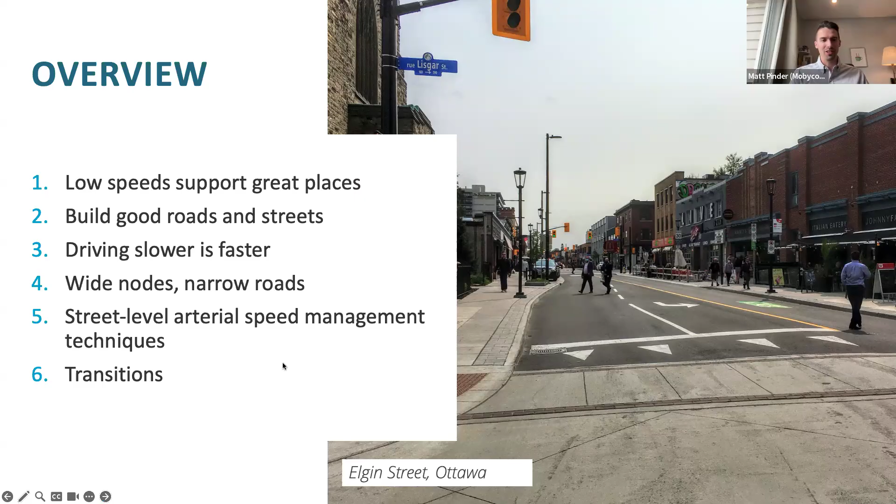And then a last discussion on transitions, urban to rural, and other types of context changes along streets.

So the first thing that I want you to take away from this presentation is the link between speed and place. There are two things that our streets and our public realms need to do in our cities.

One is move people. That's pretty clear. As a transportation practitioner, I'm pretty familiar with this one. It's essential for our activities, our economy, our services, our goods, and for us to get to work and everywhere else we need to go.

The important thing is, though, when there's a lot of movement happening in a place, it can diminish the quality of that place, and we're going to dig into that in a little bit.

But here's an example of a really well-designed movement corridor. You can see it's wide, it's open, it's pretty easy to drive along, and you can imagine someone driving at a reasonably fast speed there.

Place, on the other hand, these are the really vibrant places where you want people to be out in the street, talking to each other, socializing. This is a pedestrian street in Ottawa, but on streets with cars, of course, these activities happen as well.

Movement and place is a framework developed in Australia that has really helped guide their safety programs and a lot of how they build their community design. They basically assert that there are four types of streets or street environments.

The local streets, we're all pretty familiar with those. Civic spaces are pretty unique streets that, similar to that Sparks Street example before, have a really high focus on placemaking. But then when we talk about arterials, there are two types.

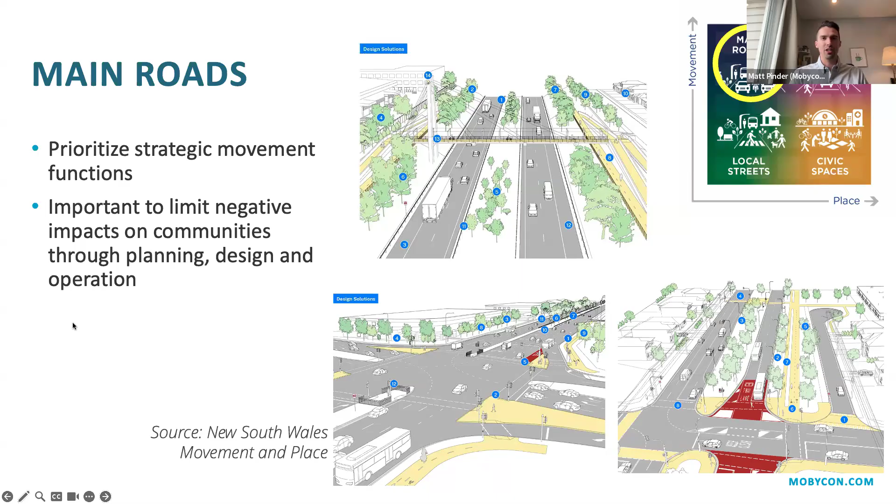These are essential for our communities, but they need to be carefully managed because they can sever communities, and there's been a lot of historical challenges created by highways in Canadian communities.

Main streets, you can see, look very different. They are trying to balance moving people in and around the area, but also creating wide, generous public realms with boulevards and patios and streetscaping and trees. Really important places for people to be able to walk and cycle easily.

A safe, low-speed environment is essential here, and there's different ways to design them depending on the suburban or urban context that need to prioritize different modes of travel.

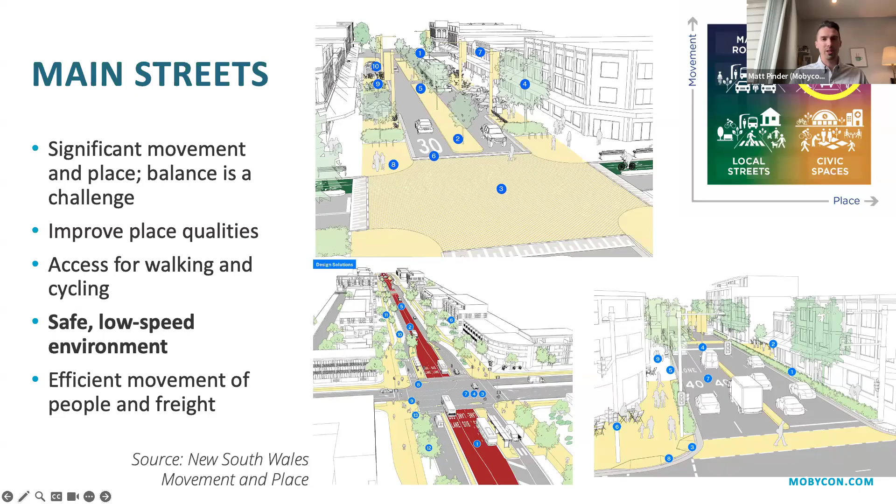And this is where speed really comes into play. In Australia, they've just published some research, an economic study looking at how speed relates to the economy of an area. They've found that reducing the speed limit from 50 to 30 kilometers an hour on any street that's important for pedestrians, so think of your town's main street or any commercial corridor, the benefits significantly outweigh the costs.

So, benefits in terms of easier to cross the street so people can shop more.

So first and foremost, when we're thinking about speed, we want to manage it in the right places, and there are some absolutely essential places to manage speed. This is how the Dutch divide up their urban roads. They have a pretty principled approach to it, and it works quite well for them. They have the lowest speed category of streets called access streets.

Because speeds are very low, these are usually the best places. There's often main streets in old towns that are wider than this, but they're still following that 30 kilometer an hour paradigm, and car traffic noise is very minimal. It's very easy to cross the street. These are wonderful places. The Dutch still have distributor roads, which we might call arterials. These are okay places, but you can start to see how traffic dominates the environment. And then the Dutch build a lot of roads through traffic corridors where there's really no desire to make any kind of place quality there.

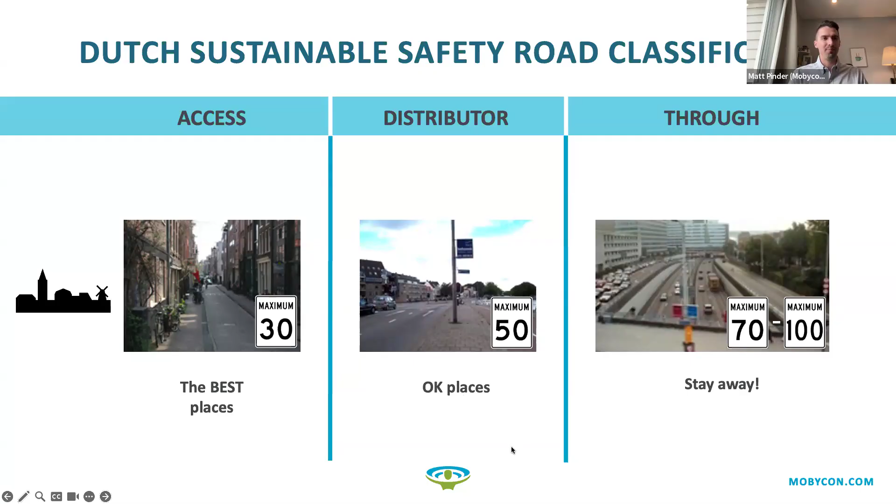So the next logical step, now that we've talked about the influence of speed on quality places, is where do we want speed to be? Where do we want to encourage speed, and where do we want to carefully manage it?

Imagine you're starting a trip from your house and you're just driving on the streets in your community. The Dutch principle is that people are willing to tolerate about 6 minutes at 30 kilometers an hour before they start to get impatient and want to be on a higher order road. After those 6 minutes, someone's willing to tolerate a faster road, like an arterial or a Dutch distributor, for about 9 minutes. And within 15 minutes, you want to have your drivers on a high-speed corridor, generally a freeway, but it could also be a well-designed road.

And you can try to relate this into your own driving experience. Many Canadians live within probably a 15-minute drive of a freeway, and those are the corridors that we're using to travel longer distances.

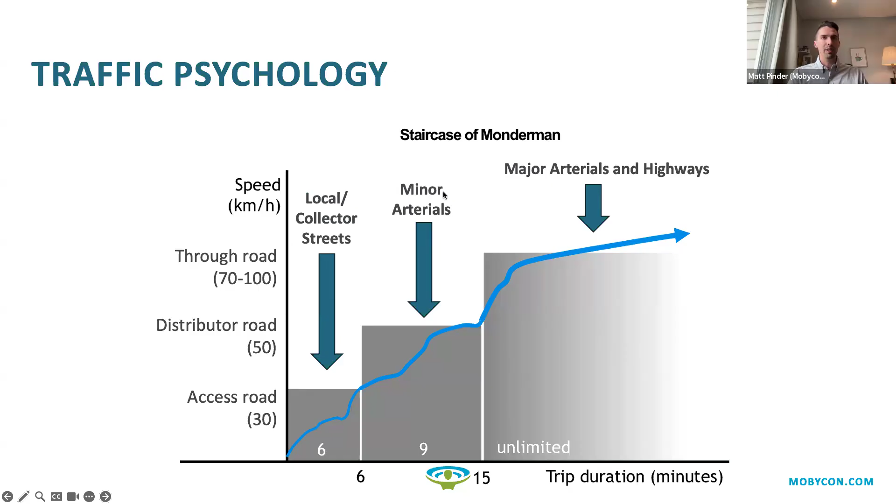And when we relate this to our street designs, that first 6 minutes is usually on local and collector streets. The next 9 minutes is on minor arterials, and then the longer trips are what we would call major arterials and highways.

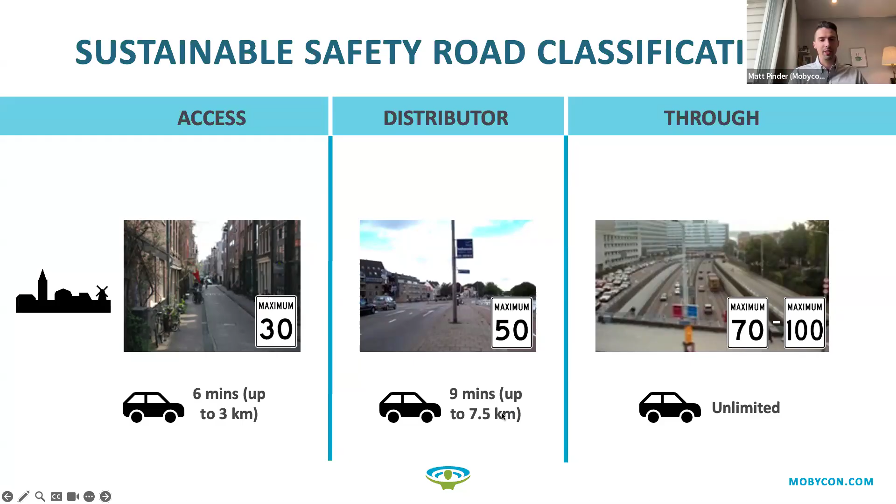And just to put some time perspective to that on the Dutch framework, that's about 3 kilometers that someone would be willing to travel in that 30-kilometer zone. So actually quite a significant distance if you put that into the scale of your neighborhood. Another 7.5 kilometers on a distributor road. And so basically everybody should be within 10 kilometers of a well-designed road that can connect to the broader mobility driving network.

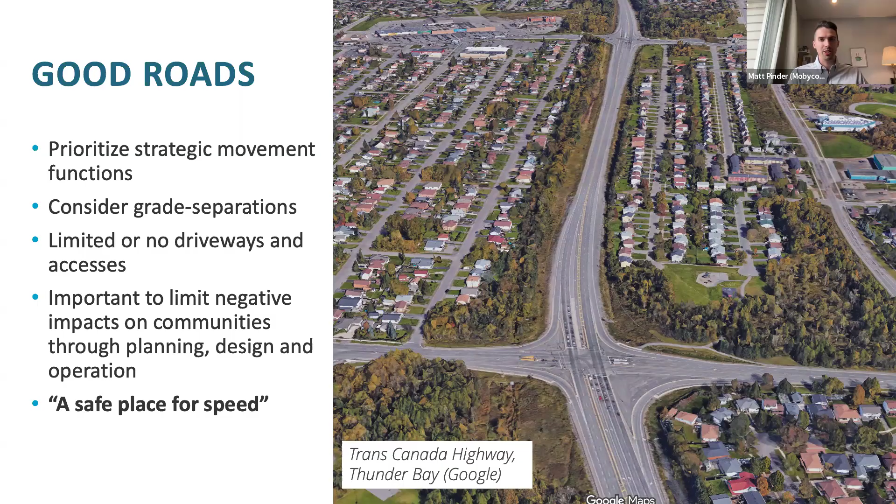So a good road, we need to build lots of these, or we need to build them right. A good, well-designed road prioritizes movement functions. It's great for goods movement. These are locations where we might build grade-separated crossings for pedestrians and cyclists, or grade-separated interchanges, like on our freeway highways. And it's really important that there's no land use along these corridors, there's no driveways, they're a very simple, well-designed environment. And what I would call this in the speed management framework is these are safe places to speed.

We have created well-designed highways where people can travel at speed without a lot of negative consequence. And our geometric design guidance for engineering has been focused on how to build great roads for many, many years. We know that we want straight roads, good alignments with super elevation, and that the lack of any of these can cause challenges. But importantly, this is the design language for how we design roads.

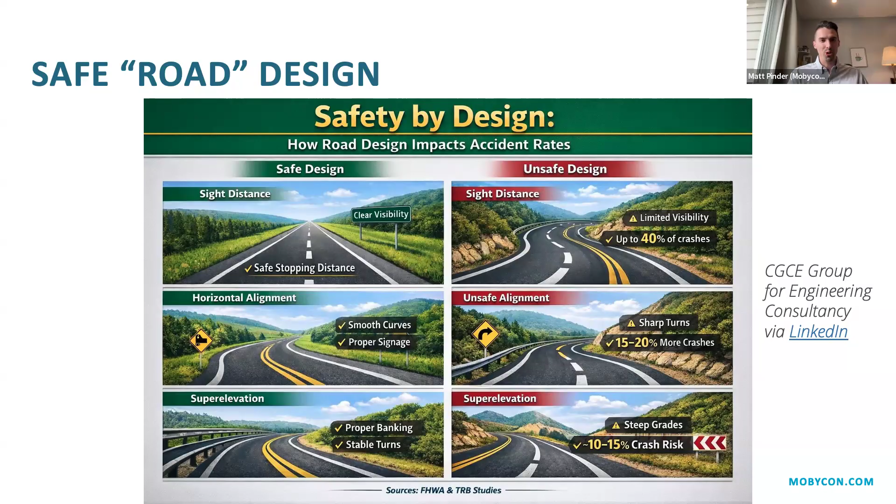I really like this framework from the Global Designing Cities Initiative on what speed is appropriate based on the context. They've basically asserted that in urban areas, 30 kilometers an hour should be the target speed, and only in certain circumstances should you be able to go above that. It's really a product of how many people are trying to cross the street, how complex the street environment is, and whether you've provided separated facilities for everybody.

So here's an example, Bank Street in Ottawa, a high activity commercial corridor with lots of people crossing the street and no dedicated bike facilities. 30 kilometers an hour would be the safe speed for this corridor.

Another example from Ottawa, Main Street, where all users are separated. There's a cycle track here, a sidewalk, and a driving area, with a little less crossing demand. 40, or in some exceptions 50 kilometers an hour, would be safe here.

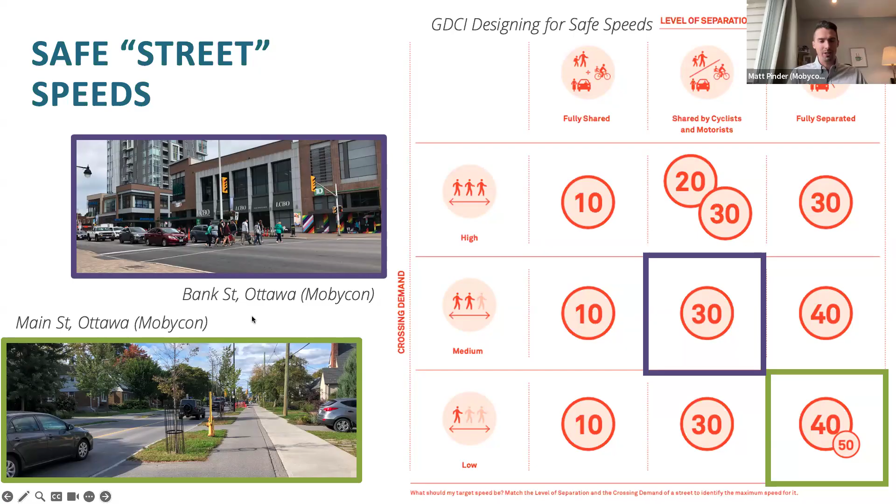You can see these environments are entirely different types of roads. Unfortunately, we've built a lot of roads that are designed like a road, but have land use and activity like a street. It's wide, straight, and flat, but it also has apartment towers, lots of driveways, lots of commercial land use. This environment is especially unsafe, and there's been a lot of academic research showing these are where pedestrian fatalities are often the highest. High speeds and high conflict potential combine to create really unsafe environments. Ideally, at the planning level, we would be avoiding this type of design.

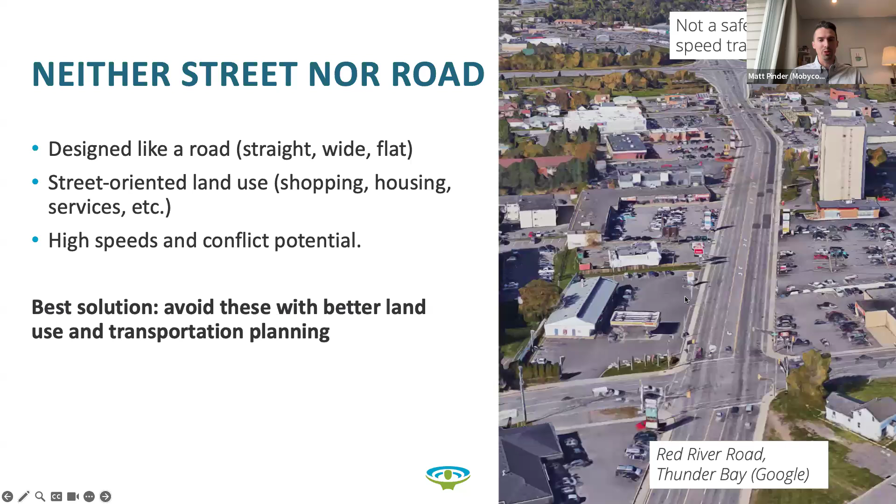If you've ever heard the term 'stroad,' this is the type of street I'm describing—it's trying to be both a street and a road. There are solutions to pick one or the other, and there are examples in the Canadian context of communities actively trying to avoid building this type and focus on the other two.

If you're trying to build a street, you're trying to slow traffic, be multimodal, focus on having buildings along the street, and create complex environments. This is the focus of the presentation today.

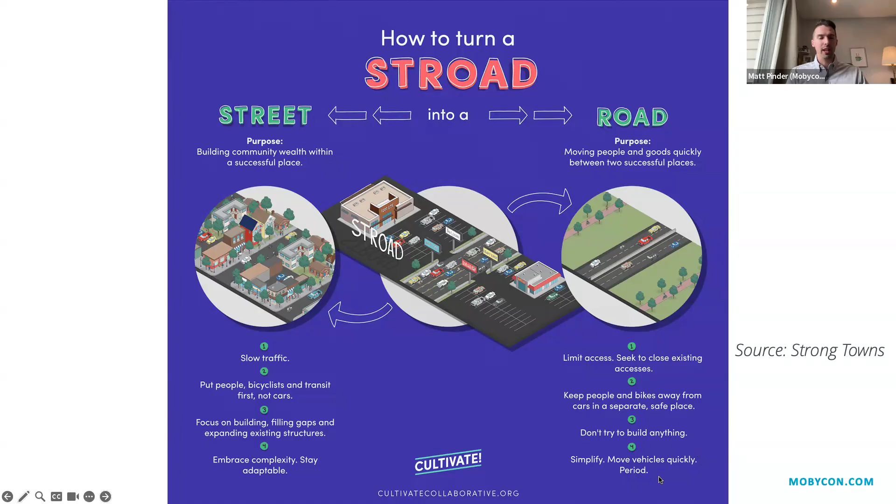Of course, if you're trying to build a good road environment, you should be limiting access. Your official plan or land use plan should not actually be calling for development abutting corridors like this, and you want to have a simple, clean driving environment.

Here's visually another contrast of these two types of environments. A good street is complex—it requires a lot of attention from drivers, demanding their focus so they operate safely in this multimodal environment. A good road demands a lot less of drivers so they can more easily process all that information while traveling at a high speed.

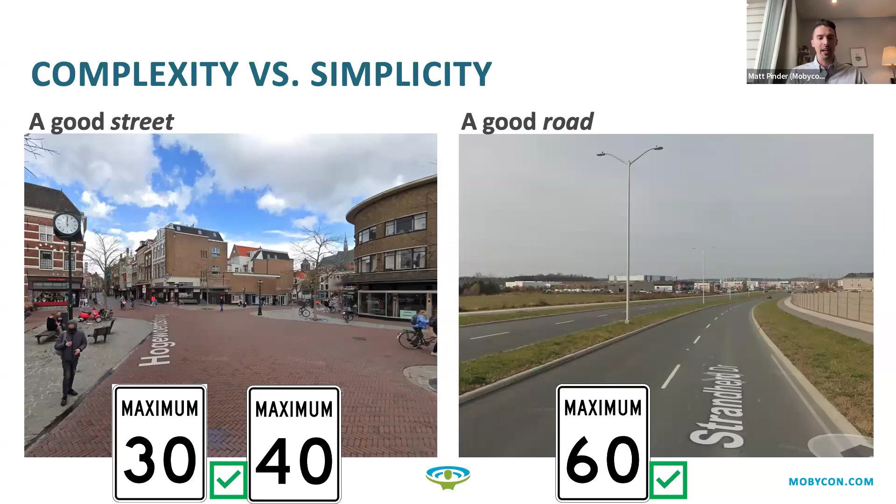This is the English translation of a Dutch principle called 'driving slower is faster.' What do I mean by this? The Dutch have really focused on creating good streets where traffic flows at a steady rate, but at a slow speed. Instead of arterials like shopping streets posted at 50 kilometers an hour in Canadian communities, where you speed up to 50 and slow down for a red light, the Dutch have tried to design steady 30 or 40 kilometer an hour corridors where you're barely speeding up or slowing down—you're just going at a constant speed.

This is one of the common street designs they use to achieve this. We're calling it a Dutch boulevard today. It's a street for moving cars, but at an appropriate speed, 30 to 50 kilometers an hour. The design, with a median in the middle, means there's no overtaking or passing possible. The median strip is a great place for planting and for turn lanes where needed. At intersections, speeds are especially managed, and pedestrians and cyclists are, of course, given their own facilities.

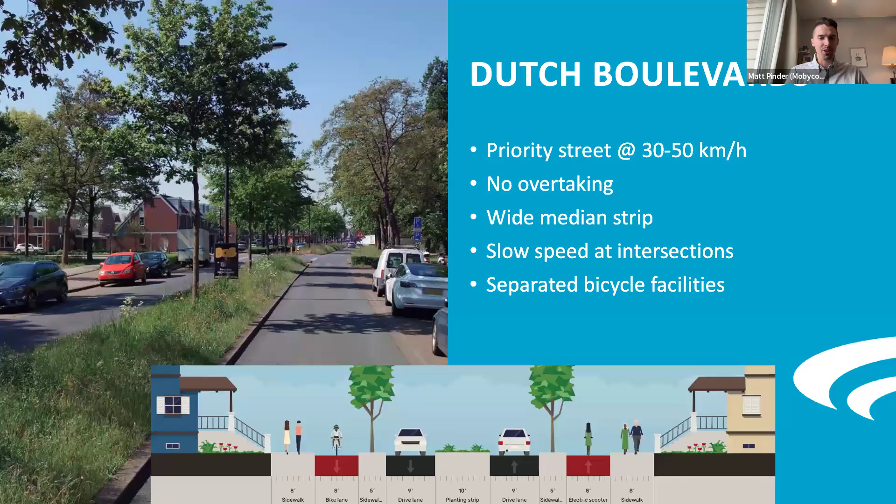And before you go and think that this is a Dutch thing, we have winter, we have other challenges here. This street type has been built in North America. Carmel, Indiana is actually an interesting leader in experimenting with this type. Their transportation master plan includes this as one of their major arterial street classifications.

One lane in each direction with a median of trees takes up roughly the same cross section as a 5-lane arterial, but you have so much more space for other functions, and you can still have the important space that's needed for a car to pull over, for an ambulance or a fire truck to pass, for example.

And from a traffic volume perspective, we tend to think 4 lanes is better than two. But when these are well designed, they can easily carry 15,000 cars a day, and possibly up to 25,000 cars a day. There's very few roads in our communities that exceed that traffic volume, especially the mid to small sized communities.

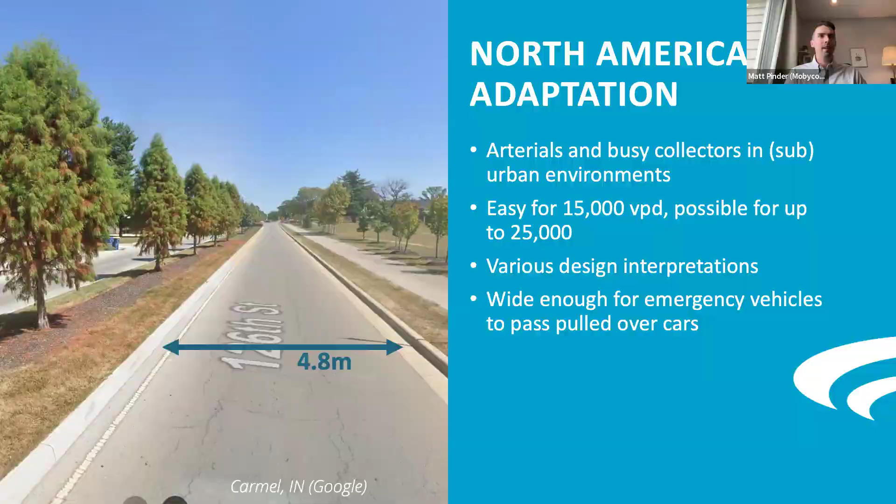Here's another example from the same city, a 5-lane arterial before. You can see it's not probably a pleasant place to be. I don't see anything going on there, but then they retrofitted the street. So the boulevard was widened, parking was added, one lane in each direction. Because there's a fire station right there on this corner, they created a mountable median, so fire trucks can easily get in and out and respond to calls. And part of the road cross section was reallocated to a bike facility there too.

So this idea of the North American street where you speed up to 50, you slow down to a red light, speed up to 50, slow down to a red light—50, I guess if we're achieving speed management well, but maybe it's often 60 or 70. This really comes down to intersection design, and the Dutch philosophy is different here.

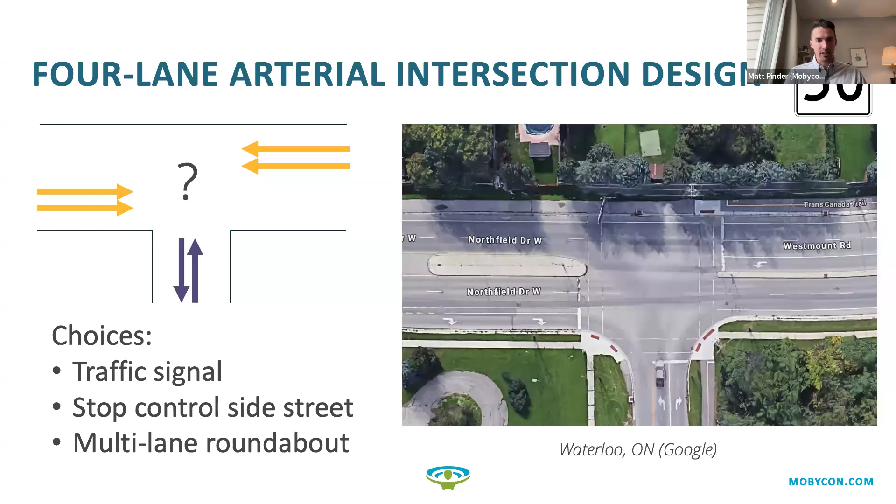If we have decided at the planning level that we're building a 4-lane road, 2 lanes in each direction, when that intersects another street, we have a limited number of choices. We can leave it unsignalized and create a dangerous situation where cars are driving out of this side street with a stop sign. We can create a multi-lane roundabout, which takes up a lot of space and has some of its own challenges, or more often than not, we're going to add a traffic signal here. And that's expensive infrastructure. As soon as you add a traffic signal, you're adding delay and you're limiting capacity of this nice wide 4-lane road that you've built.

For the same intersection, but with a 2-lane arterial, you have a few more options. You can still do a traffic signal, but a stop-controlled side street solution, like the example on the right here, is a lot more palatable, a lot safer. Drivers can turn left out of here with a lot less conflict to manage. If you build a roundabout in a situation like this, it's going to be single lane, and that's going to function a lot safer for all users. And you can easily even just do a pedestrian crosswalk, for example, on the left side of this intersection.

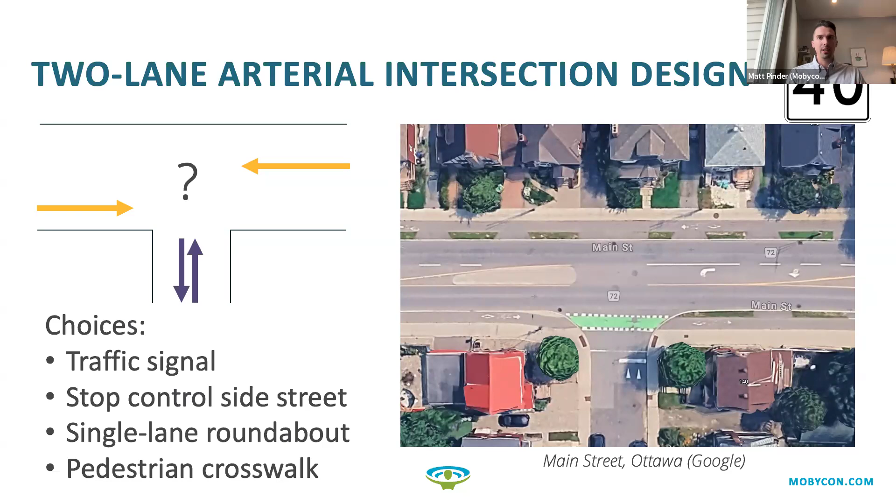Now, this is very common in the Netherlands, but we have built stuff like this in North America. This is an example from New Haven, Connecticut, where it's one of those major road crossing a minor road intersection. The status quo approach that anyone would think to do here would be build a traffic light. We have people who need to cross the street, we have cars that need to get out of this side street. But that would have either required widening the intersection, because this is a busy road, or it would have taken a lot of capacity out of that one lane in each direction road.

So instead, they tried a speed management technique of a raised intersection. Even if people are driving 50 or 60 approaching the intersection, its design means you're slowing down to 30 or 40. That's going to manage conflicts. It's going to make it easier to merge into traffic. And lo and behold, a few years after this intervention was introduced, injury crashes were down 82% here. Now, that's important to reflect on because traffic signals manage conflicts, but they aren't necessarily a safety tool. This was a road safety first approach that helped manage conflicts, but really delivered positive outcomes.

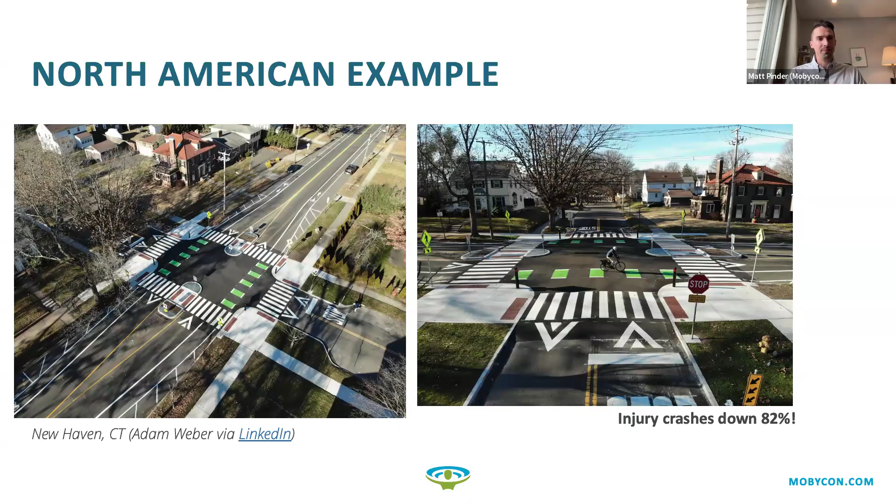This is a pretty common principle in the Netherlands to design intersections like this. Here's a pretty typical one where you have a main road going east-west, left-right across the screen. You've got bicycle crossings provided, and a pedestrian crossing, the zebra crosswalk on the left side. The lanes are narrow, so people are flowing in cars, but at lower speeds.

There's a context change at the intersection. It turns from asphalt to red surface, so drivers know that they're entering a conflict area. There's a raised crossing on this side of the intersection, but this is a high capacity intersection. We might look at this and say, oh, this would be fine for a minor collector road, but this is a corridor carrying almost 20,000 cars a day.

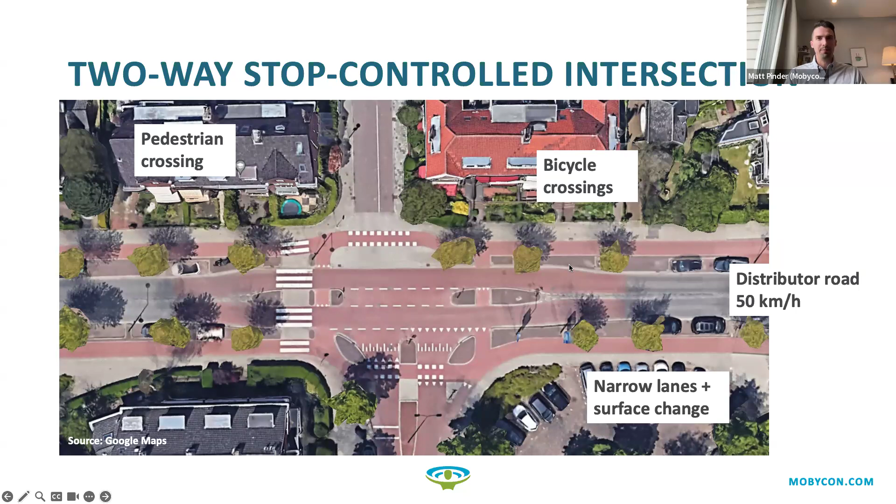The last thing to reflect on with this slower-is-faster mentality is the crossability. We want to design streets, especially streets in high activity areas, where people can easily cross. We often undervalue this decision when we're making decisions about whether the street should be 2 or 4 lanes. We undervalue what it means for pedestrians crossing the street. It is by far much, much easier for someone to cross a 2-lane road than a 4-lane one, regardless of age, regardless of ability, and regardless of speed.

But then when you make a choice to make a road multi-lane, you are going to induce higher speeds, and that's going to worsen overall safety. And finally, if you are trying to provide a crossing for people, it is much easier to provide one across a two-lane road. We have more tools in the toolbox.

It is possible to design a safe, uncontrolled crossing across a two-lane road, or a pedestrian crosswalk slash PXO. But across a four-lane road, those tools become unavailable, and you end up in situations like this where you've maybe provided the minimum 200 meters between a traffic signal and another traffic signal, but the pedestrian desire line is right in the middle of that, and you have people crossing dangerously mid-block.

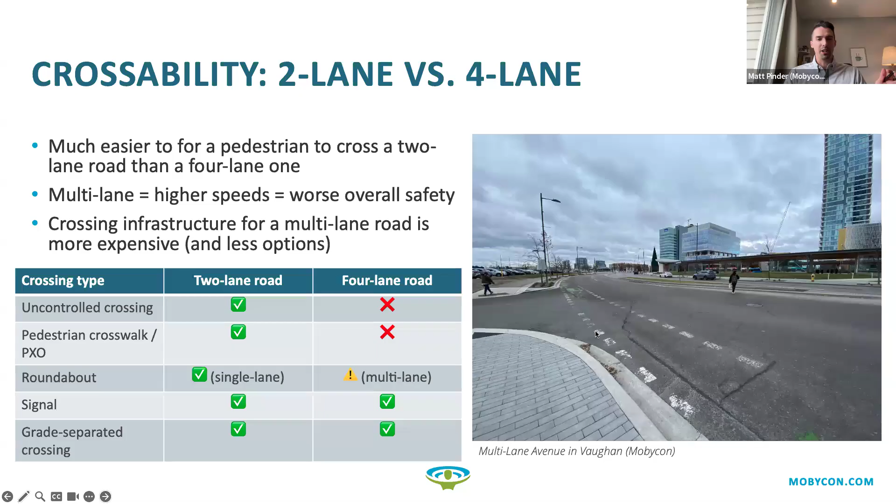This leads into another Dutch design principle of wide nodes and narrow roads. This is the idea that you should provide car capacity, but only at the locations that need it the most. This is pretty status quo street design for North America, where we design a four-lane road. We decide at the transportation master plan level this corridor needs to be four lanes for X number of vehicles per hour, and then we start adding intersections along it.

Sometimes intersections are as close as 150 to 200 meters apart. Sometimes we get spacing of 400 meters, usually not greater than that in our most dense urban and suburban areas. And what this means is that eventually we'll have large intersections where our four-lane road is intersecting another big road, but all those minor intersections along the way are going to have a lot of excess capacity. We'll right size our intersection at the big one, and then we'll have level of service A in between.

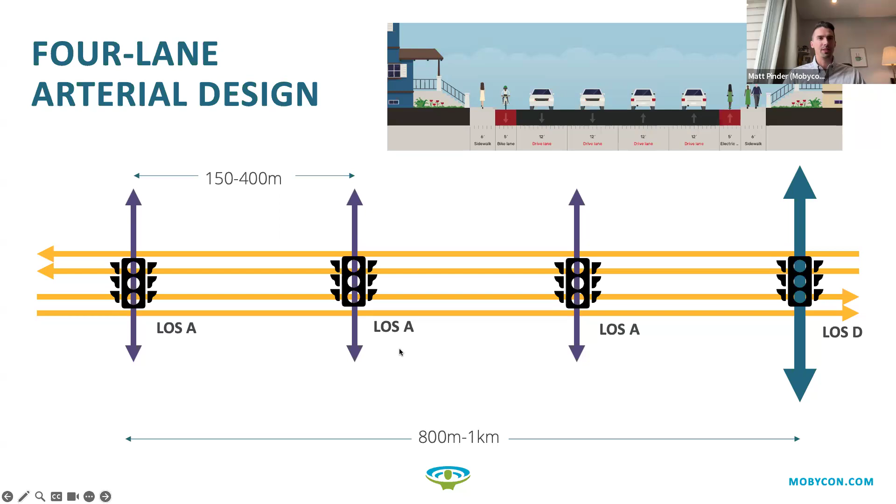This means a lot of extra green time and a lot of speeding opportunities. What the Dutch do is this wide node, narrow road philosophy. This big intersection is where we need the capacity, and where we've provided it with four lanes of travel. On the minor street intersections, the approach taken is to provide only the capacity needed. So let's say one lane in each direction gives us the same level of car service along the whole corridor. We've matched demand to capacity. We've used single lane travel in each direction to enforce a good speed limit.

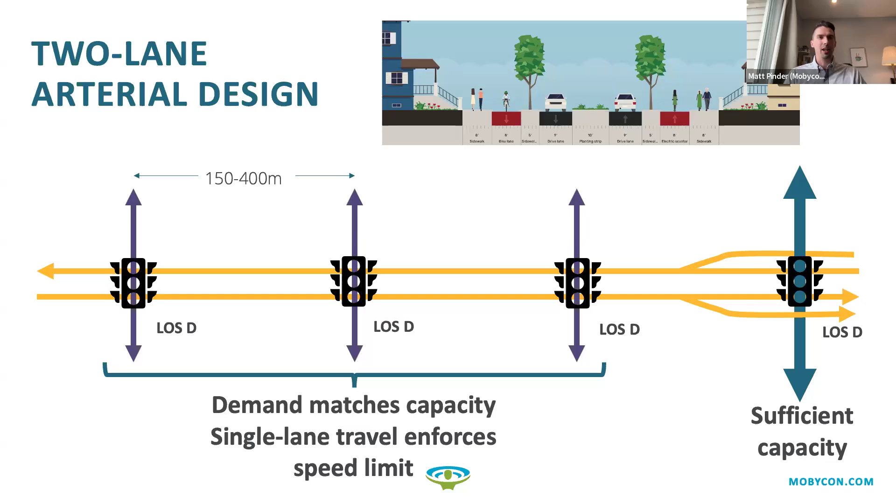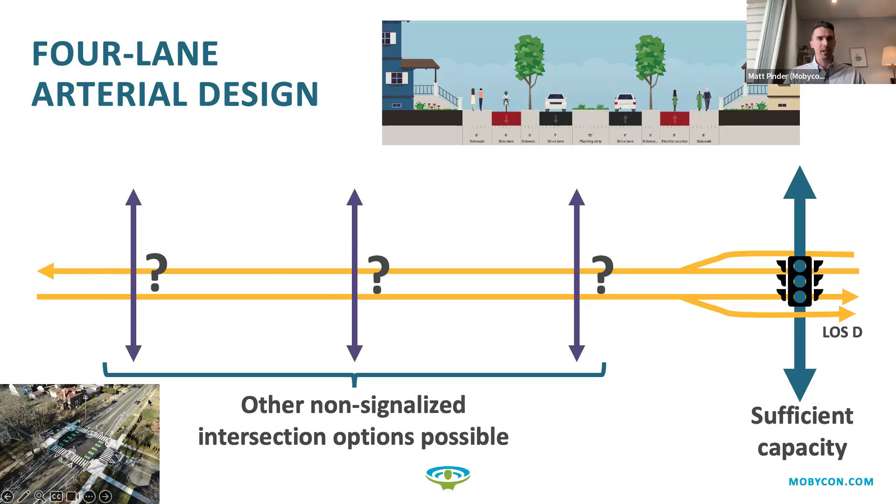But then also what we've unlocked when we do one lane in each direction is the option to do different types of intersections. We don't have to do traffic signals at all these intersections. There's other safe intersection types possible, like the one I showed from Connecticut, or other roundabouts, PXOs, pedestrian crosswalks. This is pretty commonly applied in the Netherlands, where you'll see a lot of single lane road, one lane in each direction, where there's no need for greater capacity.

But when you reach something like a highway interchange where there is a lot of car capacity needed, they will widen that intersection right out. They'll provide all the turn lanes, extra through lanes, and make sure that capacity matches demand.

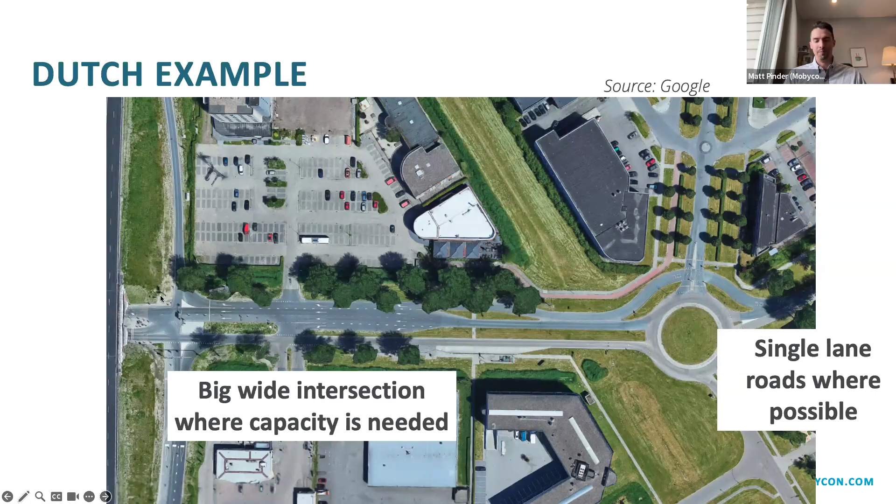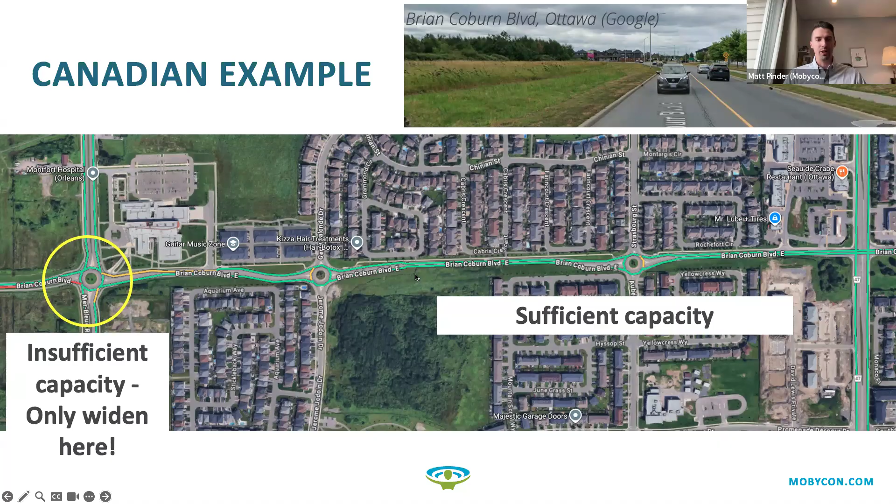When you think about this through the wide node, narrow road philosophy, all the congestion is only occurring at a single intersection here. These minor street intersections are operating just fine. Really, you just need to widen here to provide that extra capacity, and you can continue to have the safety benefits of a single lane in each direction intersection elsewhere. In this case, a lot of financial savings.

So reflecting on this four-lane versus two-lane trade-off, I would encourage all of you to have this discussion more often, rather than just assume that when you're doing a transportation master plan, four lanes is better than two, because you give up a lot when you make that decision to widen a road.

Think through it through different questions like which cross section is going to need less traffic signals, which is going to be cheaper to build, which is more crossable for pedestrians, especially if we expect a lot of pedestrian crossings, which gives us more design flexibility. Within the same amount of right-of-way, this option gives us way more opportunities to plant trees, add on-street parking, other streetscaping, bus stop amenities. Once we widen to four lanes, we have a lot less boulevard space to work with.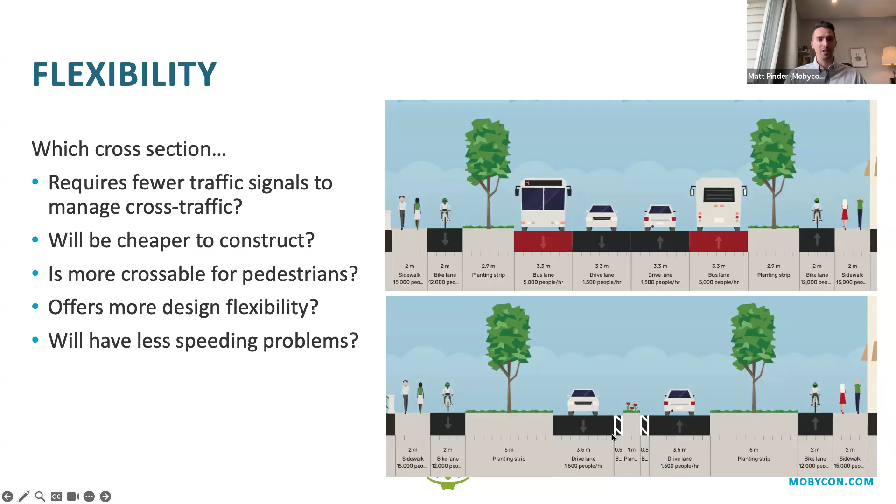And finally, relevant to this webinar, which will have less speeding problems. This is going to enforce its speed a lot more than this one.

So I'm going to pause. I want to hear a little bit of chatter in the chat on this one. I want to ask the question to everybody listening, a very simple one. Why do you think people speed? We can come back to this at the end too, but I want to know, why do you think people speed? I'll take a chance to get some water.

And maybe Brenda or Homa, you could just confirm for me, is everybody able to? Oh, there we go. I'm interested in this group, especially because you're not just transportation engineers, and that's who I'm used to working with.

So people speed because of the perception of getting somewhere faster. They're in a hurry because they can, because the road design gives them encouraging intuition, some kind of an entitlement mentality, the design of the road. They believe there won't be any consequence of it, no ticket, because we've made it comfortable to speed. It's low cost for the speeder. I think that's the no consequence piece again. People speed because they can speed. Feels good to drive fast. Speed culture, intuition.

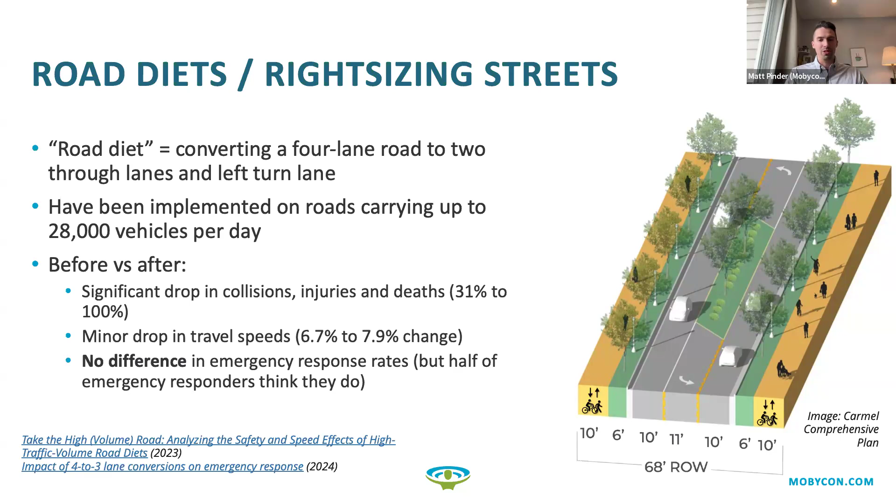When we think about road diets, it's usually in the context of adding cycling facilities. And I do want to address the elephant in the room, which is a certain bill in Ontario right now. I would actually assert that a road diet or a right-sized street is first and foremost about road safety, and it's less about what you actually do with the extra created space. You could just hatch that out for all I care, and you're going to have a much safer street. I wouldn't let certain legislation about where you can and can't build bike lanes limit your ability to use this really important road safety tool.

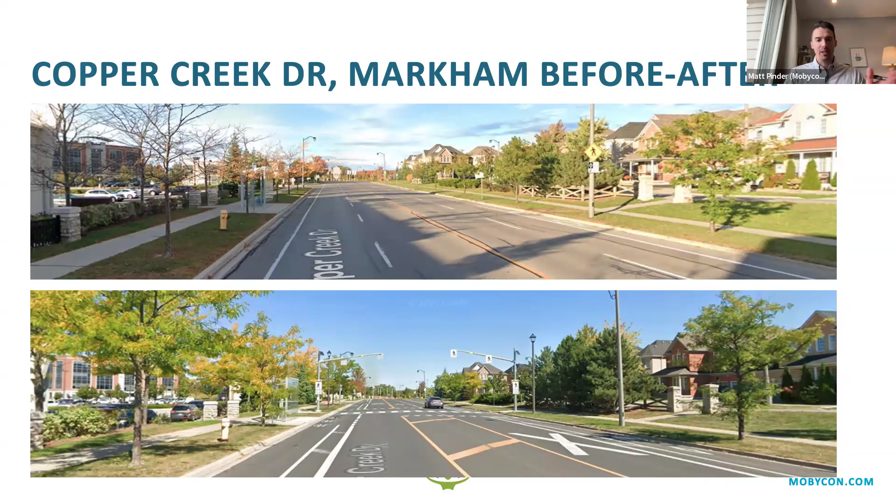So a few years ago, they came back and restriped this. They removed one lane in each direction, which also unlocked the opportunity to add a new pedestrian crossing here. A pedestrian crossing in the before example would have taken a traffic light—that's expensive infrastructure and has other consequences. A PXO was way cheaper here, and you can see that this corridor, for just the budget of restriping, is going to be a much better operating corridor from a speed perspective.

Roundabouts, another one of my favorite measures. They force speeds of 30 kilometers an hour if you're designing a single lane one, or 40 kilometers an hour if you're doing a multi-lane one. They really unlock entire different corridors.

If you have a lot of land use between two roundabouts, you can use the roundabout to turn around. All of a sudden, you don't need all these left turns and right turns into driveways. You can build continuous center medians and have smooth, continuous flow with one lane in each direction. They can also really function as a gateway feature to enter a community.

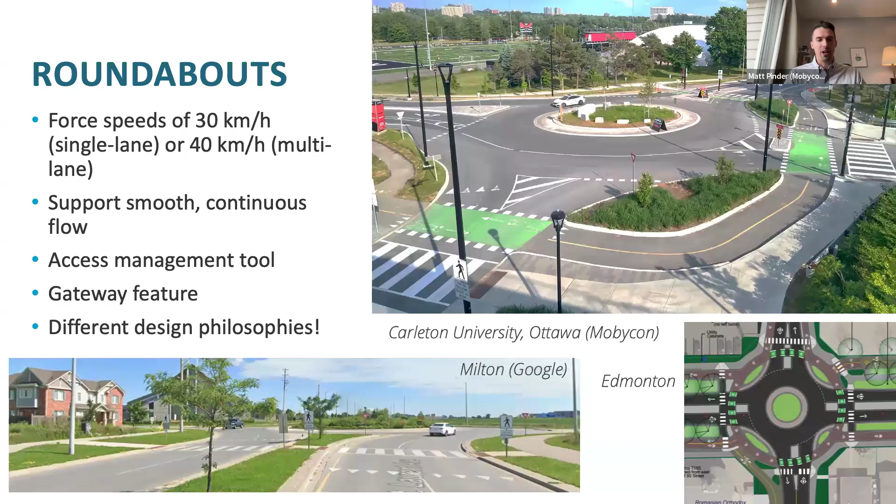Narrower lanes, another one of my favorite tools. It's pretty common to think that wider lanes is a more forgiving design and is safer. If you're designing a road, that might actually be true. But if you're designing a street with a lot of multimodal activity and a lot of need to manage speeds, you really want to go to the low end of the spectrum. Importantly, the TAC geometric design guidance does give a lot of flexibility here.

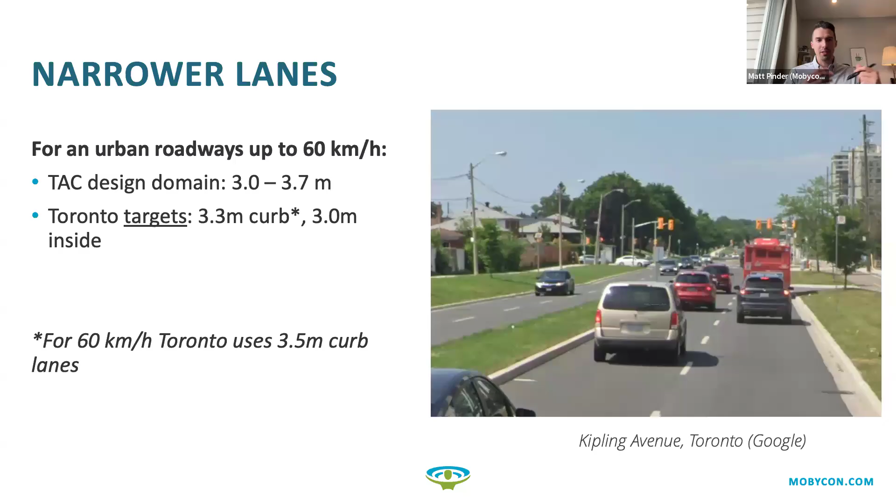Raised crossings, speed tables. Edmonton's become a real leader in this on their collector roads specifically. They have a policy goal of achieving 40 kilometers an hour, which necessitated developing some new standards. They found that the TAC guidance for raised crossings wasn't actually effective in getting speeds down to 40 kilometers an hour—the raised crossings were too light. So they developed their own guidance, worked with their transit services, tested it with vehicles, and now they've got a new standard that they've applied to over 100 locations citywide. Relative to the TAC standard, Edmonton's 40-kilometer design is higher and has steeper ramps, but they're still designed with transit vehicles in mind.

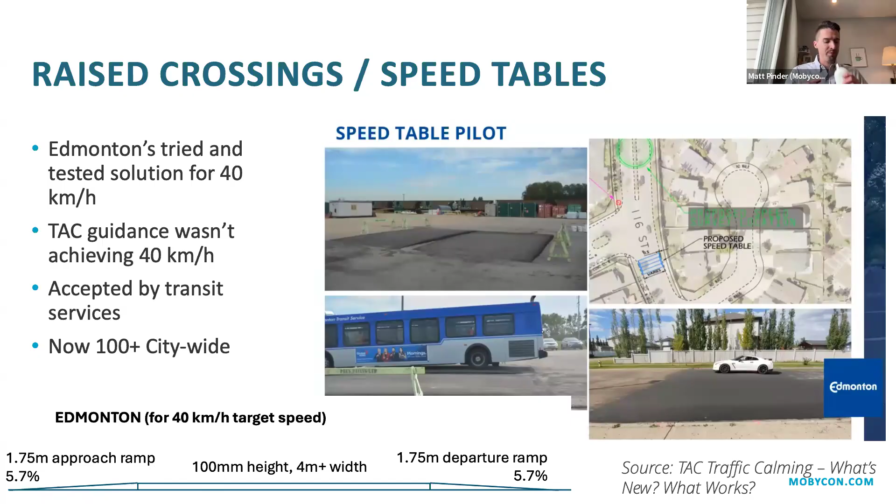One that's pretty common, or emerging, in Australia is raised safety platforms. This is the idea of a speed table, but applied just in advance of an intersection. Let's say you have a 60-kilometer-an-hour road. That might be a safe speed to achieve mid-block, but at intersections you have a lot of conflicting movements and more multimodal activity. The safe systems approach in Australia says you should actually try to slow down drivers at the intersection—say 60 down to 40—and then let them speed back up to 60 ahead of the intersection. This goes against some of the conventional mentality that speed should be constant along a corridor, but they've had really good success from a safety perspective with these.

They've published a lot of early evidence of success here. These raised features in advance of the intersection will slow down cars by about 20 kilometers an hour, and that 20 kilometers an hour is huge in its ability to save lives at those important conflict points.

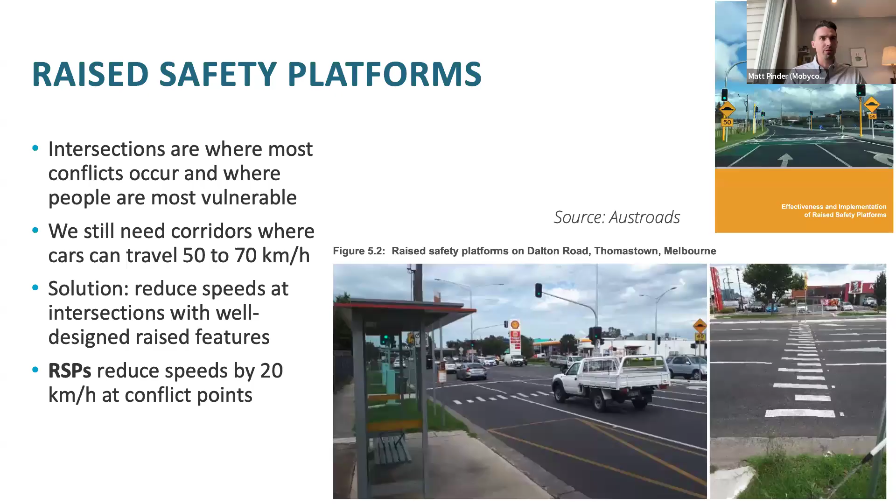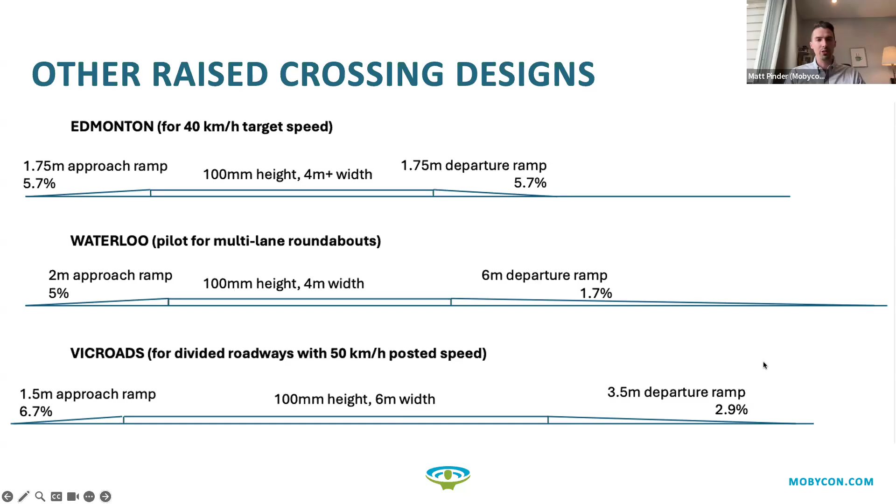Last one: lane shifts and lateral deflection. A good, well-designed road is smooth and straight. A well-designed street is actually going to encourage drivers to move around and engage them as they go along the street. It can be as simple as your intersection taper being steeper than the conventional one.

This is a limitation of TAC—they say TAC only provides tapers as low as 8 to 1. That would be the angle of this left turn lane here. But you can see by nature of this angle being sharper, a driver has to swerve as they approach the intersection, and that's going to control speeds quite well. Toronto goes as low as 5 to 1 on tapers, and I would encourage this to be used on other 30 and 40-kilometer-an-hour streets in urban areas.

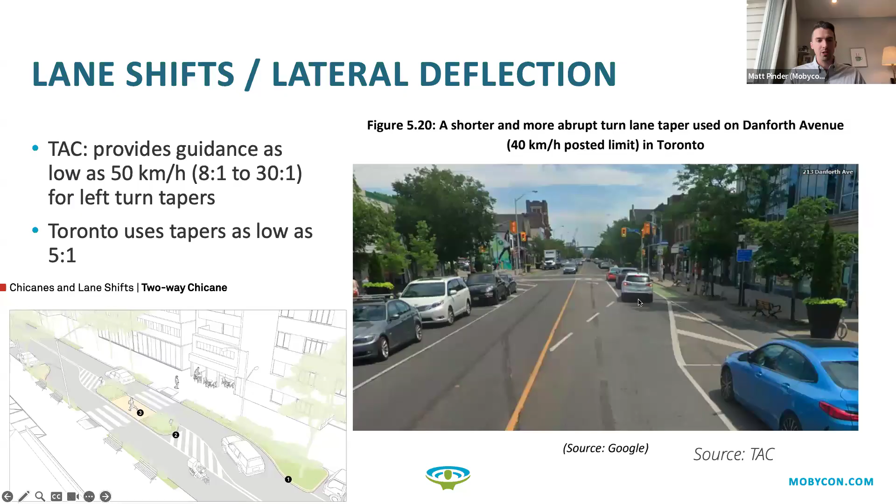Finally, transitions. How do you deal with speed management at important changes in context? This is an example from the town of Wolfville, a draft change to their street network plan. This is a town of about 10,000 people with roads that enter the town from rural areas, so you're going from rural to an urban street.

And then those streets enter the town's downtown, which is a vibrant multimodal area. What we've worked with them to help them do is at their policy level, they actually have on their classification map transition zones. These are areas where their policy says we need to do design interventions to signal a significant change in speeds, from 60 to 50 entering the town and from 50 to 30 entering the downtown. These can be any of the measures I've already talked about, but the policy says that where opportunities arise, these measures will be introduced.

So in general, any community has transitions from rural to urban, from urban to downtown, or even just entering high sensitive areas like a school zone for a certain distance.

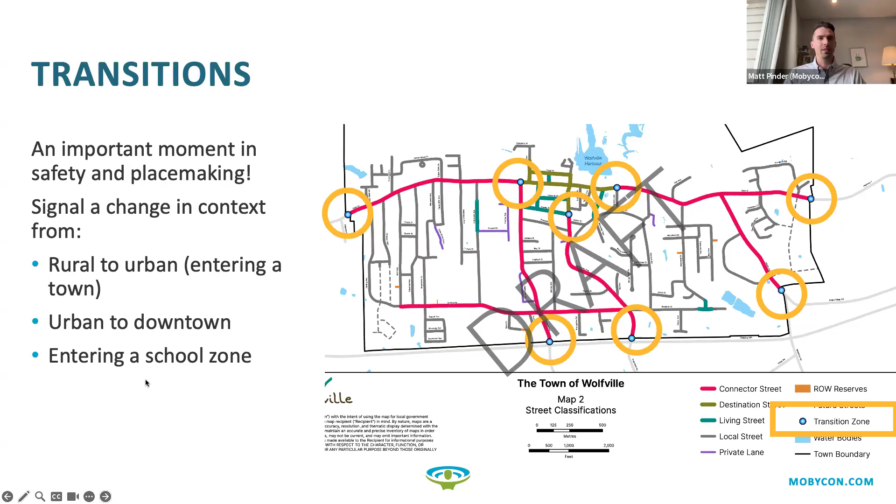Tools for signaling a change in transition: roundabouts are really good. Here's exiting a town in Ottawa, the town of Richmond. You can see built up area, roundabout, and then into the rural portion of the road.

Raised safety platforms are good for this, or any kind of raised feature. Even something so subtle as changing from a double yellow center line to a single yellow center line, I think is a really good indicator of a change in context and is not used enough. And it's a very cheap technique.

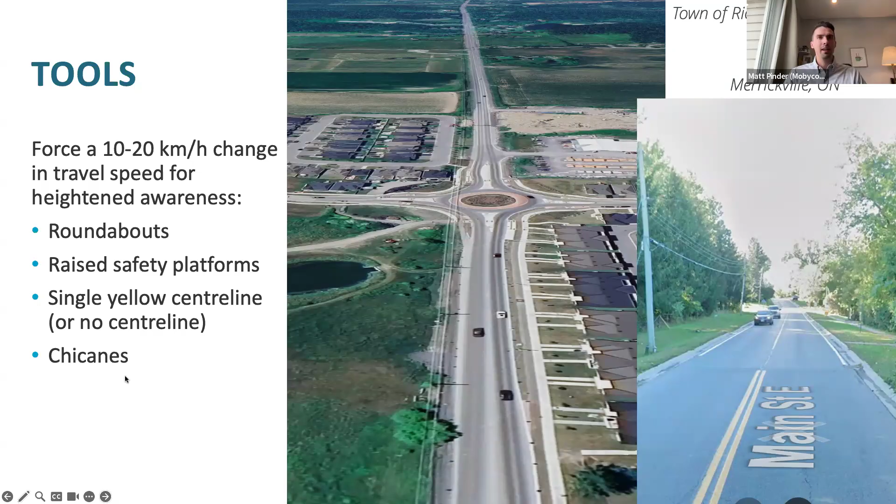Okay, so let's wrap up because I'm curious to have people's questions and talk through some of this stuff.

In conclusion, if you're looking to manage speed on arterials, it's really important to first look at the network. Pick your really good roads and design those as roads, places where people can safely speed. But in places where there's multimodal activity, where there's livability, where you're trying to intensify and add more people, it's essential to design good streets. And these are very different, almost the opposite of roads, with low speeds to support good, thriving economic places.

In those places, one lane per direction should be the target and do whatever you can to get there. One lane in each direction. Widen only at the big intersections. That's the wide node, narrow road mentality.

At the street level, when you're trying to manage speeds, focus on enclosing, engaging, deflecting, and restraining, and then focus most on the conflict points and transitions to really signal context changes to drivers.

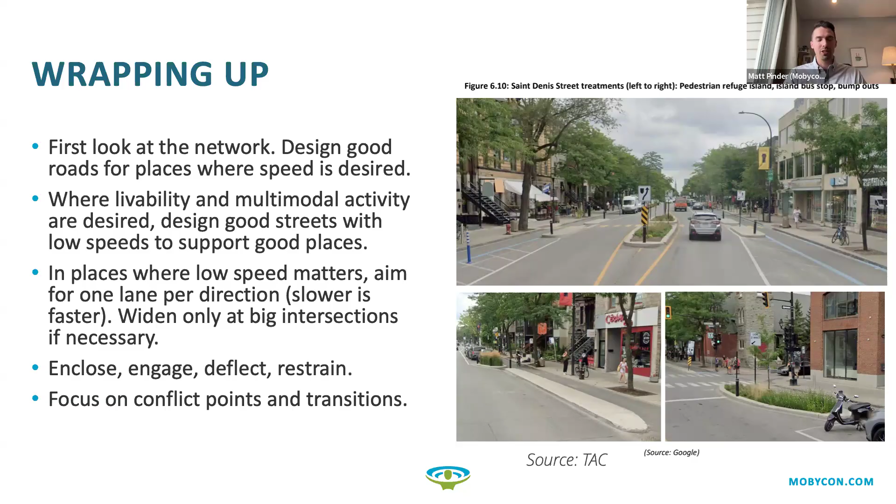So with that, thank you for your time today. Hopefully I've embedded some new ideas with all of you.

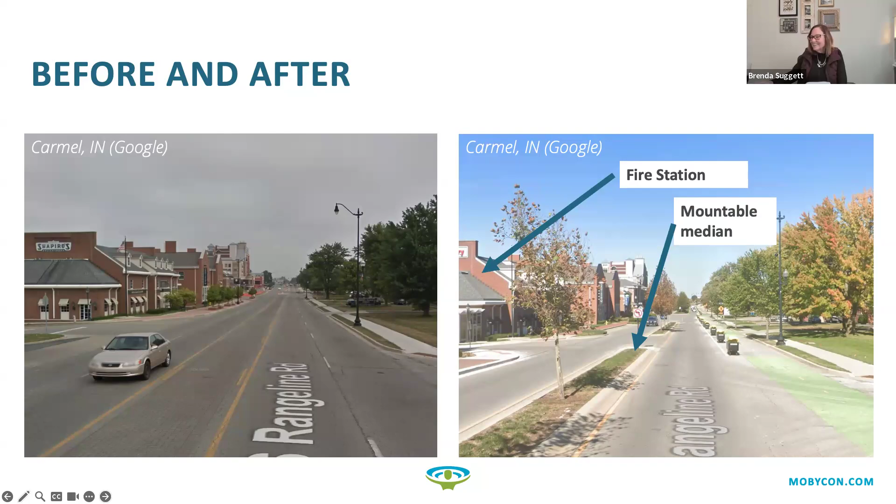Look at the design principles of a managed speed arterial: enclose, engage, deflect, and restrain. Snow certainly encloses the roadway when it's piled up at the edges, creating a visual barrier and making the road seem smaller. Sometimes, depending on where snow is, you're having to travel in different parts of the roadway, and in certain communities, they'd pile it up in the middle, which restrains or narrows the roadway. We need to design these features so winter maintenance can manage them. But snow tells us how tolerant we are, or how familiar we already are with a complex driving environment. A snow-covered arterial is very complex, and people adjust their behavior to that. So why not design complex environments from the beginning? The fact that City of Edmonton has built 100 raised crossings tells me a winter city can certainly do this work.

One of the participants joked about Toronto using snowbanks to narrow streets - that's one of their strategies. Ottawa's local and collector streets get about a meter or three meters narrower in the winter when the snow starts to pile up.

Someone raised a question about distracted driving - from a safety perspective, how to prevent distracted driving when designing lane shifts. I think that's the tension of roads and streets. If you're used to designing roads, you think: I need to make a simple environment, one where if someone is distracted, they won't hurt themselves or others. When designing a street, you do the opposite - intentionally creating a complex environment that demands attention so people won't choose to be distracted and will stay focused on driving. If you make a mistake at 30 kilometers an hour and miss your lane taper, running into the back of someone, nobody's going to get hurt or killed. So the consequences of not following that lane shift are a lot less than a high-speed collision on a high-speed road.

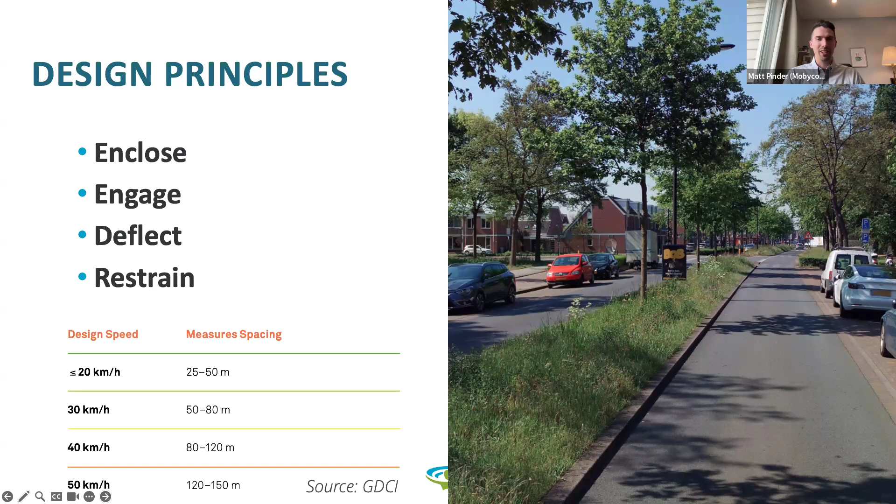I don't see any more questions, but I have one myself. You mentioned savings in terms of costs during your presentation, like putting in fewer traffic lights. I was curious if any municipalities or jurisdictions you've worked with have needed a financial or business case to emphasize the savings from your design, beyond just safety. I have not personally, but when I review TMPs and look at the sheer cost of widening roadways, it's incredible - millions of dollars per kilometer. Everybody says they're cash strapped right now, so we're either going to widen a lot less or raise taxes. I would love to find more creative solutions that involve neither, and instead use money collected from development and taxpayers to further safety and livability in our communities.

That makes so much sense. That's great. I just want to thank you again for your time and for doing this excellent presentation. Any last thoughts you want to share with us, Matt?

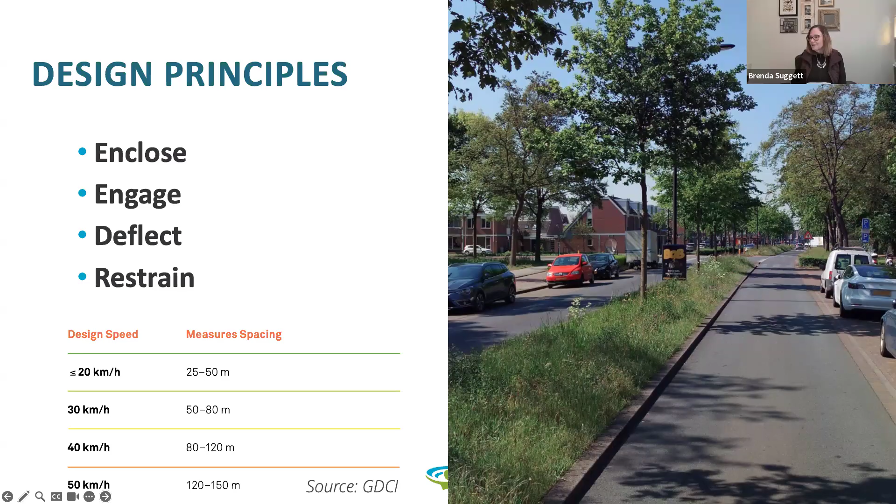It was a pleasure to present. I'm looking forward to having a similar conversation at the CARSP conference in Halifax, alongside practitioners of other backgrounds too.